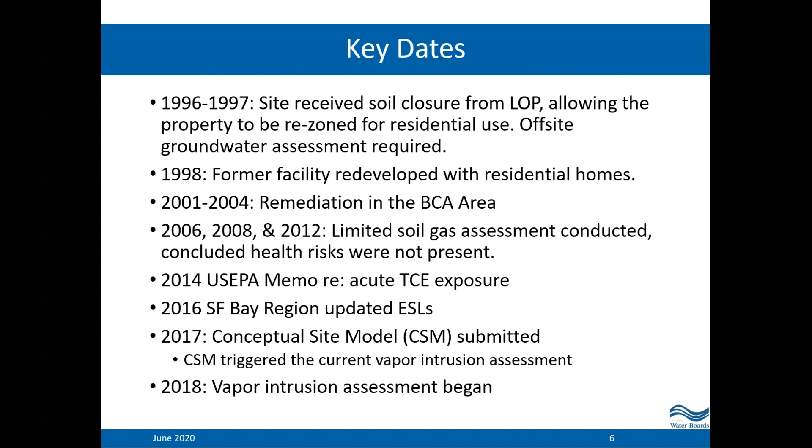So the vapor intrusion investigation began with the approval of the initial soil gas work plan in January of 2018. The work plan proposed the installation of 14 soil gas probes, which were installed in May 2018 and sampled the following month in June. Based on those results, indoor air sampling was going to be necessary. In July of 2018, the indoor air sampling work plan was submitted and approved. And this work plan included a decision flowchart, which established a clear path forward for the entire vapor intrusion investigation.

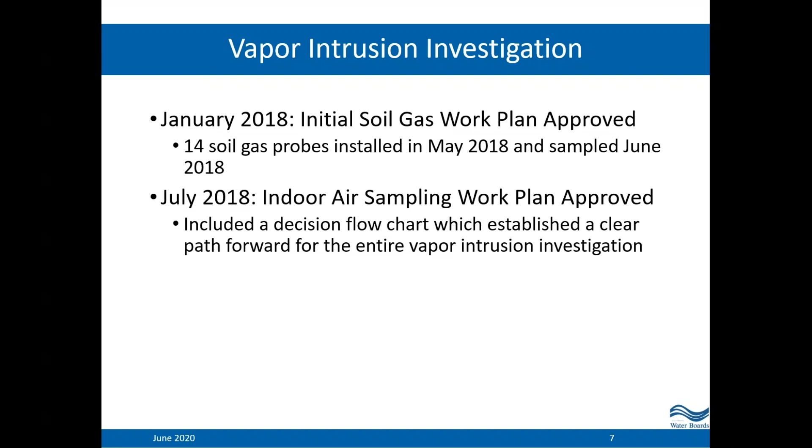So decision flowcharts were prepared for residential and commercial properties as part of that initial indoor air sampling work plan. Since TCE has short-term exposure risks, this allowed the investigation to continually move forward without requiring additional work plans for next steps. They were already anticipated and laid out. And this allowed for simple addendums to be submitted for our approval when additional soil gas probes needed to be installed for further delineation, or additional homes were to be included in the investigation.

And there were 3 main paths that were anticipated to be conducted. One, the installation and sampling of soil gas probes. The second, determining buildings for indoor air sampling based on soil gas results. And then the third was sampling indoor air.

But access played a crucial part initially with keeping all of these wheels spinning. There are 3 commercial properties and 11 homeowner association communities which required access agreements to install soil gas probes, even on the streets within those communities. And many communities did delay providing access out of concern for things like property value or how this would make their community look, out of liability, fear that they would be responsible if something was found, and so on.

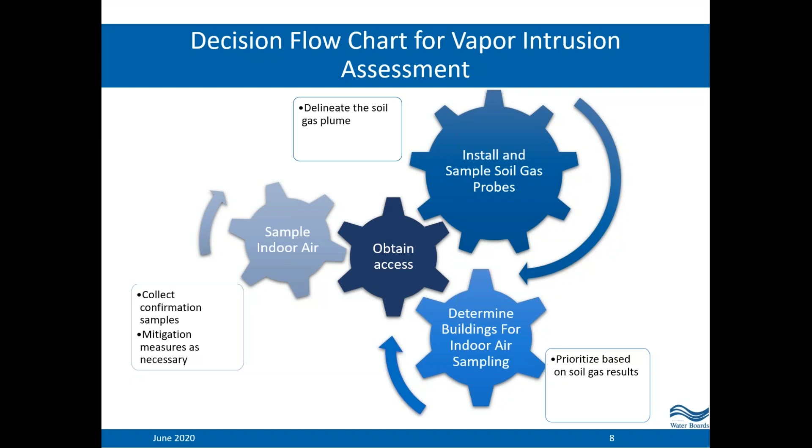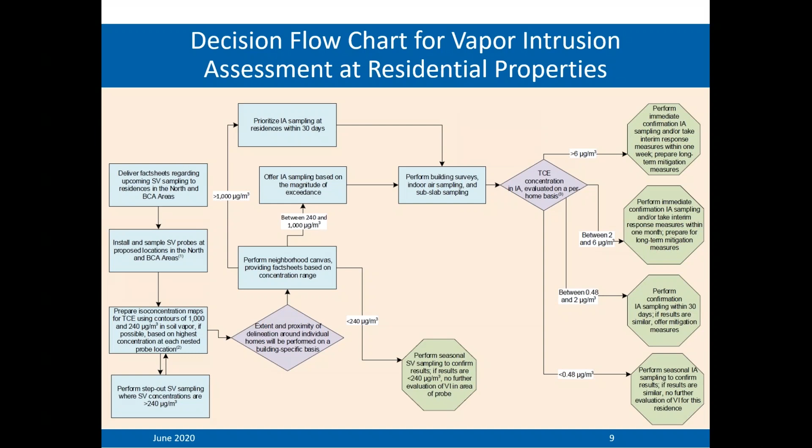Now, this is what the decision flow charts looked like within the work plan. So the following groups were broken down into those initial steps regarding the soil gas assessment, which included delineating the soil gas plume to non-detect. And this section outlines the next steps based on the soil gas results, prioritizing homes that should be evaluated first based on short-term exposure risks. And then this area outlined the next steps based on indoor air results, which also included timeframes for when the next steps should occur. And the flow charts were based on the current vapor intrusion guidance documents, the 2016 ESLs, and the US EPA TCE action levels.

So now we're going to transition to the vapor intrusion investigation portion of this presentation, but first just want to provide a brief overview of vapor intrusion. As you know, vapor intrusion is the migration of vapors in the subsurface into a building. So here is just a simple vapor intrusion conceptual model to show a source, whether it's in the soil or dissolved in groundwater, and how soil gas can migrate in the subsurface and potentially enter a building through cracks in the foundations or utilities that enter the building.

Now, for this site, the primary contaminants of concern, as I mentioned, are TCE and PCE. Weather conditions such as barometric pressure, wind, and temperature, as well as the use of heating and air conditioning, can affect vapor intrusion, which is why, regardless of results, samples are being collected during both winter and summer seasons.

Now, groundwater concentrations can be used to evaluate the potential for vapor intrusion to occur, but the preferred sampling method is collecting soil gas samples. And soil gas samples should be collected from multiple depths: 15 feet below the foundation of the building if you have deeper groundwater, and no shallower than 5 feet below ground surface. And those sampling depths are for evaluating the building for potential vapor intrusion. Deeper soil gas sampling is still necessary for evaluating the extent of the soil gas plume if groundwater is deeper.

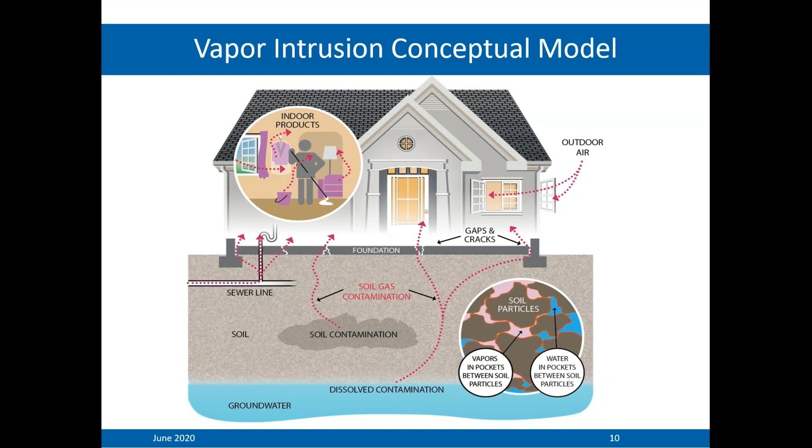For this site, since there's no basements, the soil gas probes are installed at 5 and 15 feet below the ground surface. And regardless of the depth, the highest soil gas concentrations are considered when evaluating a building for potential vapor intrusion. Soil gas samples are analyzed for all VOCs. Indoor air samples are collected over a 24-hour period from various rooms and analyzed for select VOCs. And the work is being conducted in accordance with the current vapor intrusion guidance documents.

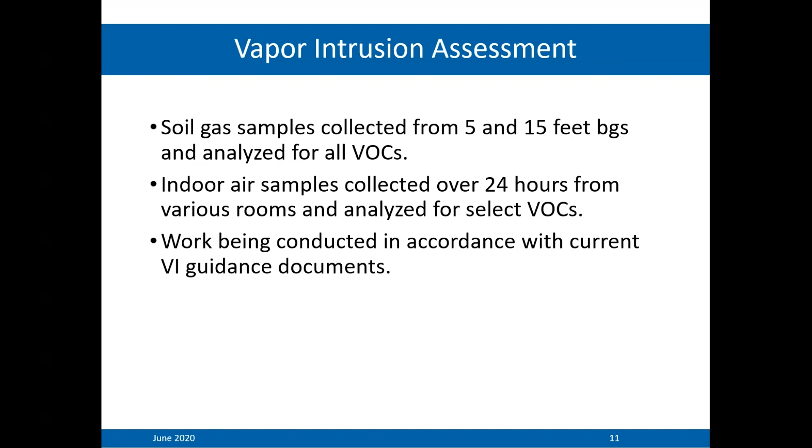So here is a very detailed project timeline since the vapor intrusion assessment began. Bear with me and I'll kind of cover many aspects of this. So as I mentioned, the work plan was first approved in January 2018, and the first initial soil gas probes were installed in May 2018, with them being sampled that following month in June. The first indoor air samples were collected in July from a commercial building, and the first residential samples were collected in August 2018. Now, some of the number totals for this project since the investigation began through December 31st, 2019.

549 homes have been offered indoor air sampling, and there are 298 executed access agreements. At least 281 homes have been sampled at least one time, and there are 3 commercial properties that have been sampled at least once. There are 311 soil gas sampling locations. And as I mentioned, each sampling location has a soil gas probe at 5 and 15 feet, with the exception of a couple areas where there is shallower groundwater and they couldn't get a deeper soil gas probe installed.

You'll also see that there's two references, SG, which refers to soil gas. Those are the soil gas locations for delineating and evaluating the entire soil gas plume. And then there's what's referred to as PSG, or parcel soil gas probes. And those are soil gas probes that have been placed around buildings for buildings that cannot have subslab soil gas probes placed inside them for various reasons. And then there have also been over 1,300 soil gas samples collected over the last year and a half of this investigation.

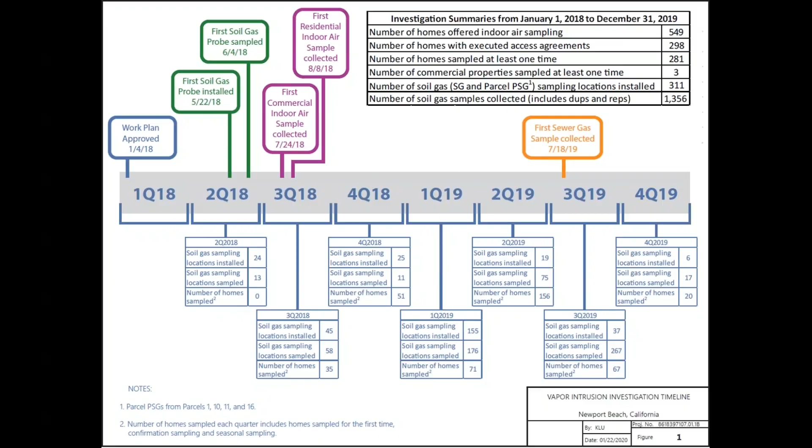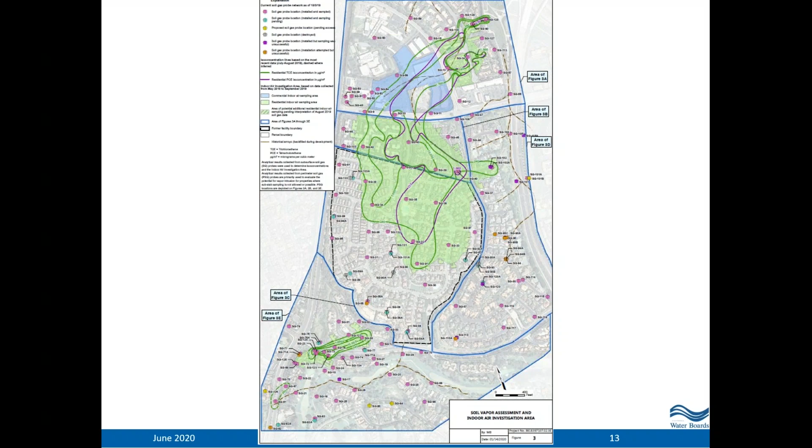So now I'm going to zoom in a little bit to a few select areas of the plume. There are additional probes on this figure that were not on that primary figure that I showed on the previous slide. And those are those perimeter soil gas probes that I had mentioned. Again, due to various reasons, some communities like this one could not have subslab soil gas probes installed. So these probes are placed around the building to evaluate indoor air samples too.

And the higher density of these soil gas probes have shown that at the plume edges, preferential pathways do play a significant role in the migration of the soil gas plume. And again, here's another example of the soil gas plume having a small portion migrate away from the plume edge. Now, based on the known hydrology, groundwater did not flow this direction. Yet the soil gas plume has migrated east between these two buried arroyos.

And this just, again, reinforces the need and the importance of delineating to non-detect and properly placing the soil gas probes, in this case, both near buried arroyos and between them, and not making any assumptions for how one may think this soil gas plume will behave, needing to have that data to support any assumptions.

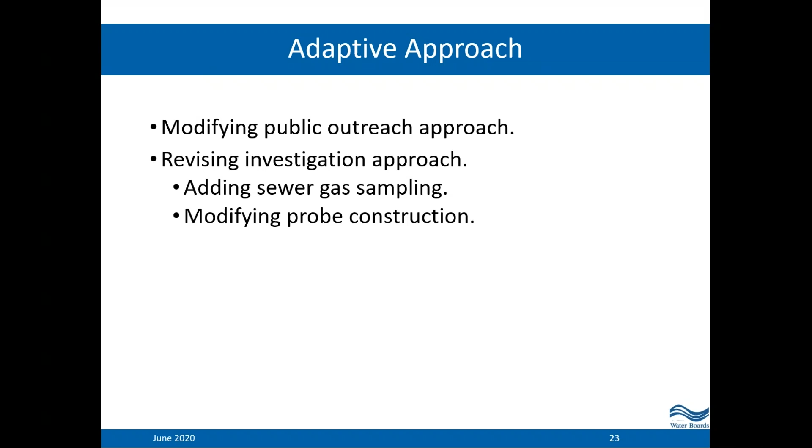And we also learned along the way that utilizing figures within the presentation did not convey the information we hoped it would. It created confusion. Therefore, we presented figures on poster boards at the back of the room and offered to discuss them one-on-one after the meeting. And this approach has been incredibly successful. Then the willingness to course correct along the way, revising the investigation approach, such as adding sewer gas sampling as an additional line of evidence for select areas, or modifying the probe construction.

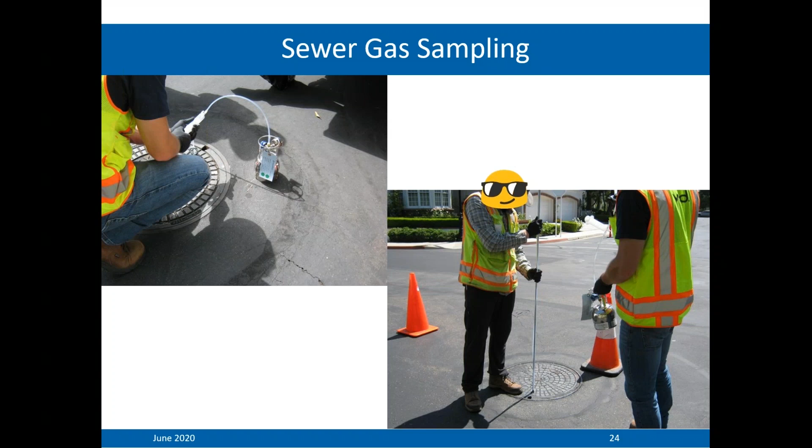And then the final key component for the success of this investigation has been transparency. And here's just a couple of examples. The ESLs were updated over the course of this investigation. And one of the ESLs happened to have been updated 1 month prior to one of our community meetings. So in order to maintain that transparency, we discussed that update during the presentation and what the path forward was going to be for the project at that meeting.

Now, this investigation began in 2018 and everything was designed around the 2016 ESLs, and we are still utilizing those ESLs as our initial screening levels at this time. However, as I mentioned, we do want the soil gas plume delineated to non-detect. So that way, once the indoor air results come in, it can be evaluated to determine if it is necessary to step out and include additional buildings for vapor intrusion investigation.

And I mentioned earlier that the work is being done in a phased approach, and this includes the sampling of buildings, starting where the soil gas concentrations are the highest. So it was the appropriate path forward for the project at that time.

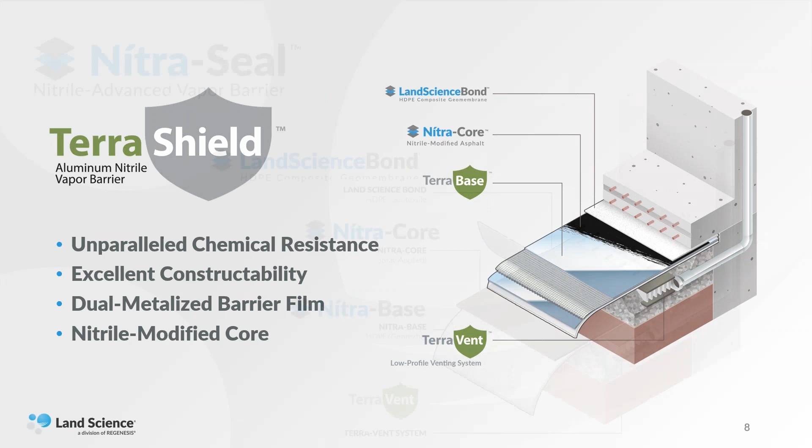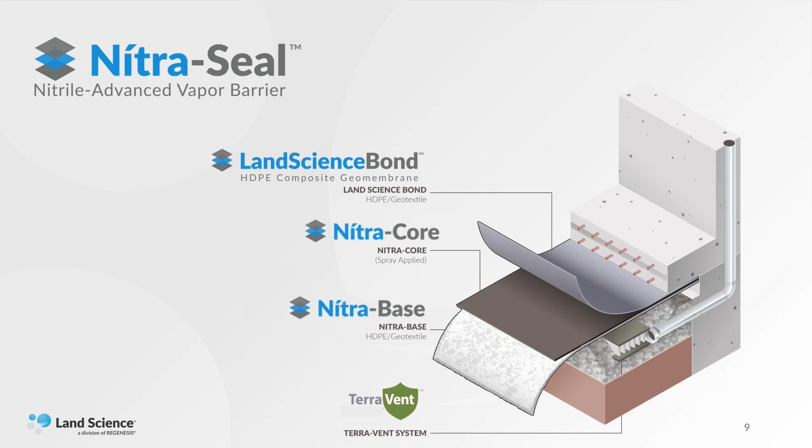We also offer Nitra-Seal now, which is very similar to our GeoSeal. However, the difference there, as you can see, is we have a nitra base. So the base is a bit different, still similar in the HDPE process, and then also a nitra core. Because the nitra core has even more chemical resistance, we can lessen that thickness. GeoSeal will be sprayed at 60 mils, where Nitra-Seal can be sprayed at 40 mils.

And last, MonoShield. MonoShield gives us an opportunity to combat some of the situations where we face large warehouses with a vapor intrusion concern, where you have large areas that have to be protected. At some points, a 3-layered system is not really going to be the most cost-effective or constructable. So what we've offered here is a single layer system. It's a 30 mil. It also has the metallized film, as you can see here in the picture.

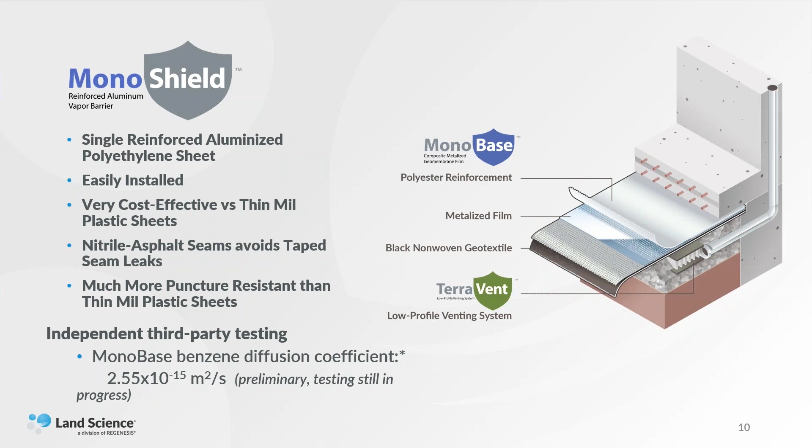And instead of spraying the core over the entire barrier, we're spraying the seams at a 60 mil spray with a 6-inch overlap. You can also see here we have independent third-party testing for this barrier as well, with benzene diffusivity at 2.55 x 10^-15. Significant protection. We've already installed almost 5 million square feet of MonoShield in just a year.

And last, I just wanted to briefly talk about how Land Science not only offers the barriers, but we are so confident in our barriers that we can offer various warranties for them. So if there's ever a question, I encourage you to reach out to us or to one of our managers or engineers and inquire about what type of warranty we could possibly offer. And with that, I will end my discussion.